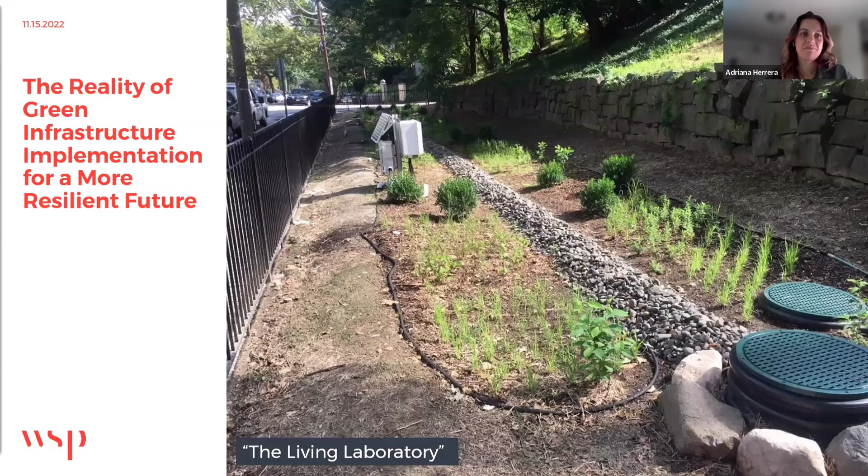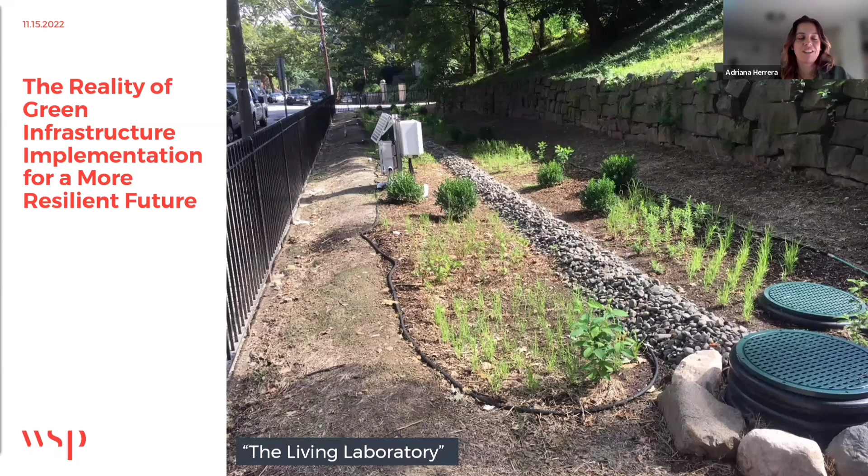As you mentioned, my name is Adriana Herrera. Fun fact, I was actually a part of the inception of the Living Laboratory as part of my senior design project in 2016, working as a member of the first team to do basic concept design and modeling for green infrastructure practices throughout the watershed of the Stevens campus with Professor Fassman-Beck and Professor Brunel, which now currently exists on campus. So if you walk by, you can check it out.

That was completed by other students after my time, but working on paper, so to speak, I had no construction or feasibility of implementation experience, which has led me to my discussion today with you all, where I hope to share the positive impact that green infrastructure can make on a more resilient and sustainable community, but how one must consider all the enablers and barriers that go into the implementation outside of the design and innovation that we all love to dig our brains into.

So just a quick background about myself and my journey to how I got here. As it was previously mentioned, I'm a Stevens alum. I graduated in 2016 with an environmental engineering degree. I started my career at TRC Environmental, where I worked as a remediation engineer specializing in groundwater treatment. I managed sampling programs and injection systems for about 3 years.

I switched internally within the company to work in their site and land development department, where I worked alongside construction management to integrate and assess stormwater management practices and systems. All the while, I was working towards my master's degree at Stevens with a focus on water resources, which I completed in May 2021. Looking to expand my stormwater management water resources expertise, I joined the WSP team a little bit under a year ago as a water resource engineer, where I currently work with a fantastic team, performing hydrologic and hydraulic studies, designing green infrastructure, and supporting dam rehabilitation work.

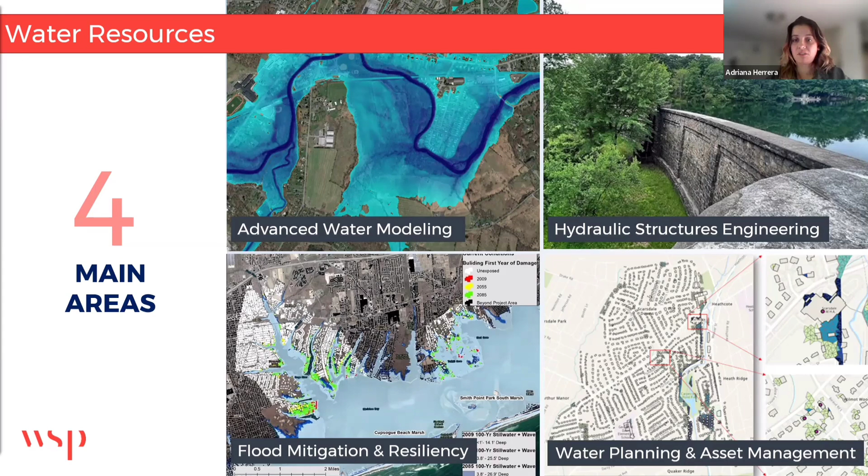One such solution practice is that of green infrastructure or nature-based solutions. The solution type is becoming more frequently a response to a growing environmental concern of climate change, which has increased storm event frequency, increased storm severity and rainfall volumes, and contributed to sea level rise, leaving many environments at risk. Specifically, urban environments, which typically consist of high impervious areas, are in need of a sustainable and resilient solution, such as green infrastructure, to manage the strain on the existing systems.

And this is a current project that is being worked on by WSP. And some of you will recognize, there's Stevens campus in the middle corner, where we've done an assessment in Hoboken.

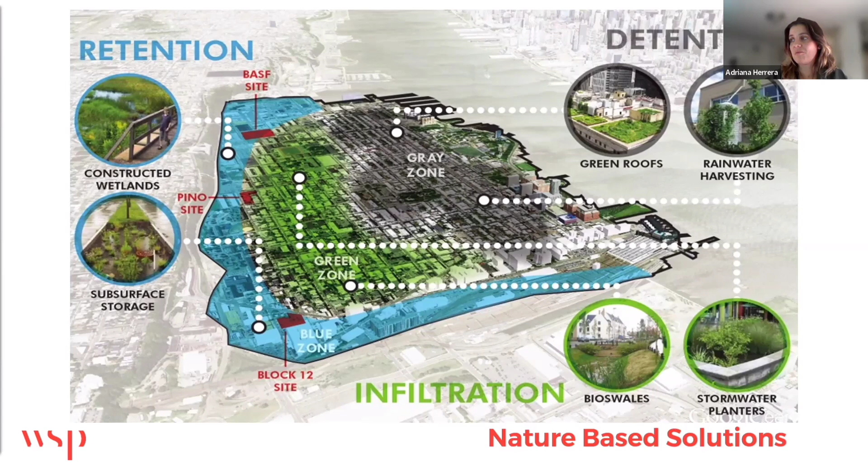So why implement nature-based solutions? Beyond water management, nature-based solutions can also improve air and water quality, provide climate resiliency, and benefit habitats. However, within communities, green infrastructure can also reduce infrastructure costs, such as water and energy consumption, promote economic growth by creating construction and maintenance jobs, and impact the health of the community, providing more green spaces for recreation.

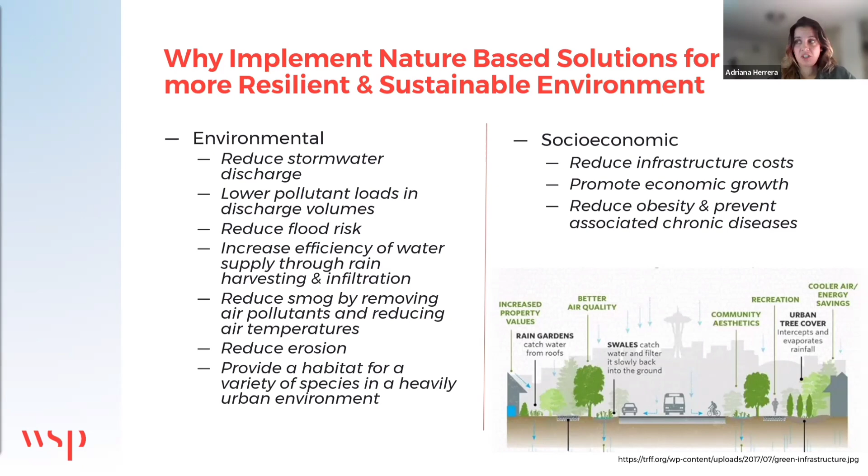Seems like a no-brainer that urban planning should become more sustainable and resilient by incorporating green infrastructure into urban development. However, we do have to balance novel design concepts such as constructed wetlands, rain gardens, porous pavement with the reality of planning and construction barriers. Furthermore, how do we meet our clients' needs with consideration for their own limitations in terms of funding and space?

So, general barriers to green infrastructure. There are some general limitations that take the form of technical and physical, either lack of knowledge or conflict in space; legal and regulatory, conflicting laws or not enough regulation guidance; financial impacts, where there's misperception of costs or lack of data to counter otherwise; and then community institutional perception of the benefits and implementation of green infrastructure.

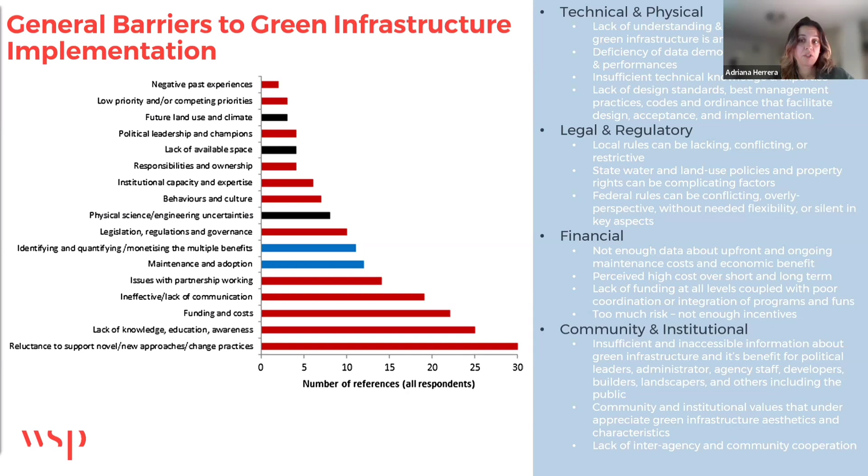So, green infrastructure implementation approach. How do we, as a hired consultant, then steer our client in the right direction to ensure a sustainable and resilient solution that prepares for changing conditions, resists or withstands stressors, recovers positively from excess strain, and provides socioeconomic and environmental benefit, by taking into account an interdisciplinary approach: understanding the need for green infrastructure through risk assessment, exposure, sensitivity, and adaptive capacity; strategy development, determining a strategy that is resilient to barriers through analysis of responses and recovery, understanding the hazards mitigation;

planning and policy making, making sure that that strategy aligns with not only your regulating governing bodies and appropriate permitting, but also with your key stakeholders, both internal and external; funding, ensuring to understand all appropriate funding sources that would alleviate community barriers that perceive green infrastructure as expensive, understanding how to invest your prioritization across the green infrastructure practices, and then the funding mechanisms, short-term, long-term capital funding of the municipality or developer themselves, or applicability for federal and grant funding.

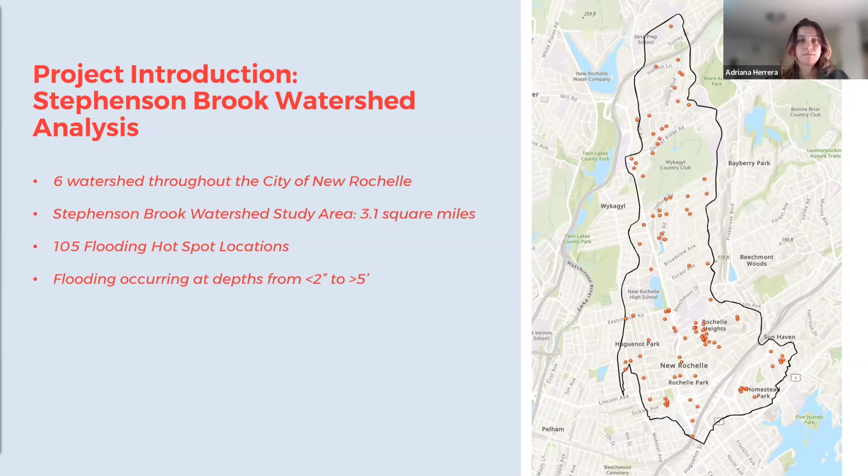So for the vulnerability and resilience assessment, the risk assessment was performed for the Stephenson Brook prior to the commencement of the project. It was conducted with a data review and field reconnaissance. Various publicly available institutes, including USDA, FEMA, NOAA, USGS, Westchester County, and the New York State DEC, were utilized for additional data acquisition on top of client-provided materials.

The field team assessed each location with a field reconnaissance to determine the topography in relation to the drainage inlets, the catch basin locations, and the number and quality of infrastructure catchments, and also to determine the existing system routing.

The initial review allows for clear communication and engagement with the community and other stakeholders to avoid any negative or misperception barriers. Throughout the field reconnaissance, our team, as always whenever you enter a job site, receives a lot of public scrutiny. So when talking with the public, you need to make sure that you understand and get their opinions and views of the situation. And also it's best to work with management and the client on how to proceed with public engagement.

In this case, the review proved especially beneficial, since during the reconnaissance we discovered that in the existing client data showing pipe and drainage infrastructure, a huge majority of the existing storm sewer connections, slopes, and inverts were missing. Without this initial vulnerability and resilience assessment, we would not have been able to determine where to site green infrastructure or where to model our hydraulics without that missing data. That would have been a technical barrier our team would have encountered. We then sent out additional field data collection with a sub-consultant to survey this information.

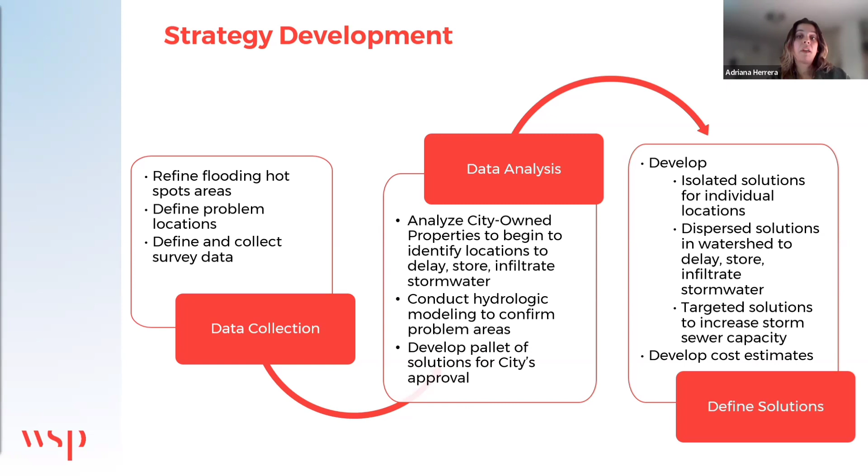This sounds really quick and simple. However, it took a few meetings, a couple of weeks' worth of back and forth with the client and all the appropriate stakeholders involved, to ensure that this strategic plan of what we're providing them aligns with what they want and need, as well as, as I mentioned, their funding sources.

So I've spoken a lot about stakeholders, and the key stakeholders would be the client, WSP, City Council, DPW, and the community. Our planning, as I mentioned, and strategic development needs to account for all of these stakeholders' needs and what they're going to be contributing and how they're going to be utilizing this plan and model that we've designed

after the fact. I didn't include governing agencies or regulatory agencies in here as a stakeholder, as I'm focusing more on the direct. However, those governing bodies would be included, especially when you're going through a construction phase and you'll need to be applying for permits.

This particular project, with planning and policy making, also incorporated that the green infrastructure only be sited in the right of way, which kind of helps avoid the public versus private barrier, especially when going through regulation policies.

So funding. This aspect of the project we have yet to begin, so my slide is a little sparse. However, based on our strategic planning, we already know how and what we're going to be implementing. We want to make sure that we're providing our client with an investment prioritization, and this goes back to our cost-effective strategy. Sorry. This goes back to how we want to make sure that we're providing them the strategic planning. Excuse me. Let me just reset.

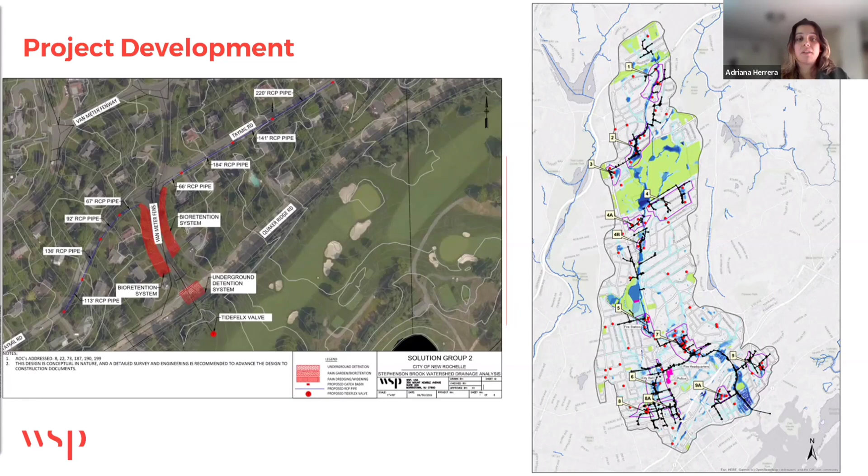And now for the fun part that we all love, the project development. Our team has completed our H&H modeling, and we're assessing the flooding locations, and our team is siting different green infrastructure and hard infrastructure practices. You can see this is an example. It's not a complete design yet of how we're going to be proposing new pipe lengths, new bioretention systems, new underground detention systems, and I'll just quickly go through a brief introduction of the different types of solution palettes that our team has assessed.

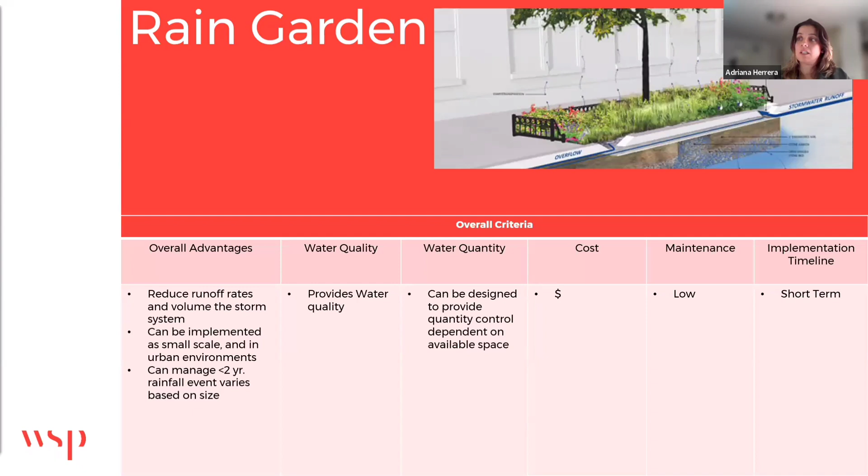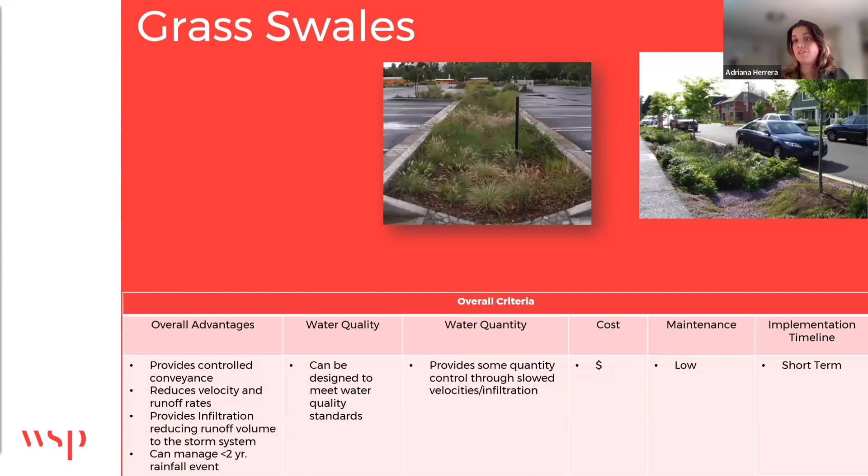Our team has, with the implementation strategy, gone through overall advantages, water quality, water quantity, cost criteria, maintenance, and then implementation timeline to help the city determine a prioritization ranking, not just from funding, but also for their BCA, benefit cost analysis. We've gone through rain gardens. We've also gone through grass swales, which, as you can see, the green infrastructure cost is relatively on the lower scale. And I will show that in comparison as we get into harder infrastructure, porous pavement, the cost starts to increase.

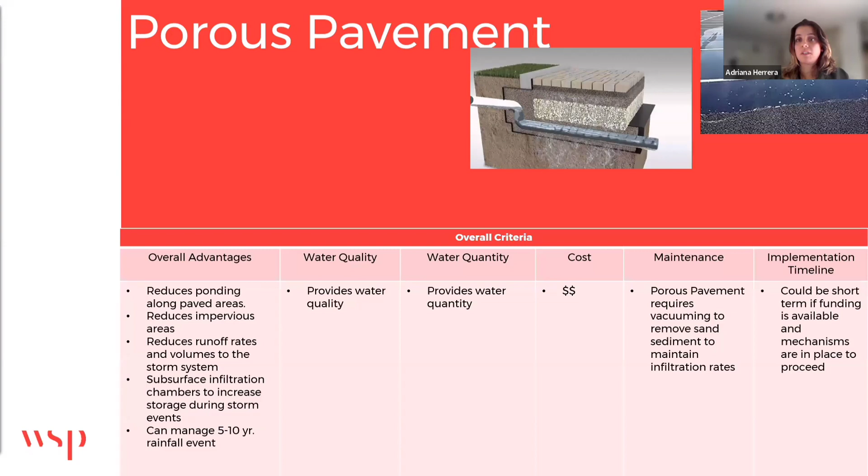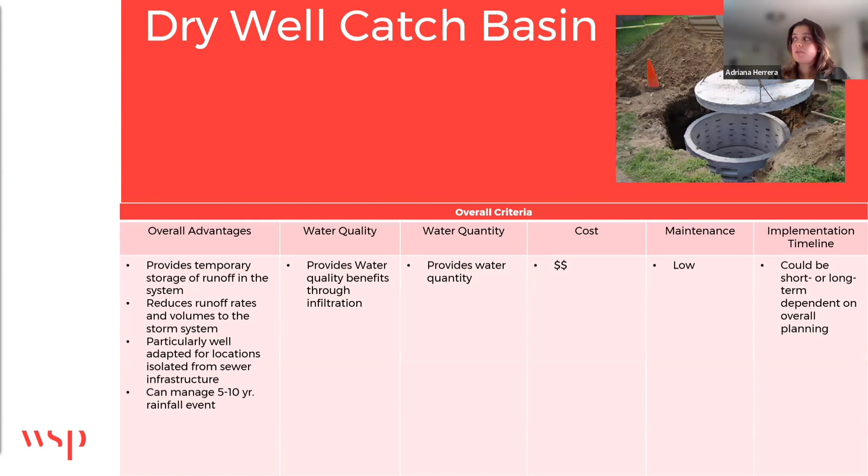The overall advantages for all of these, however, would be reduction in runoff, underground detention, a dry well catch basin, which provides temporary storage to alleviate the system. Our primary goal for short-term projects is to detain as much water so that during the storm, the conveyance is limited. Then we move into our very gray infrastructure, where we are adding additional inlets and also increasing pipe capacity sizes, where this would fall into more long-term capital funding type work, depending on the city's prioritization and flooding analysis.

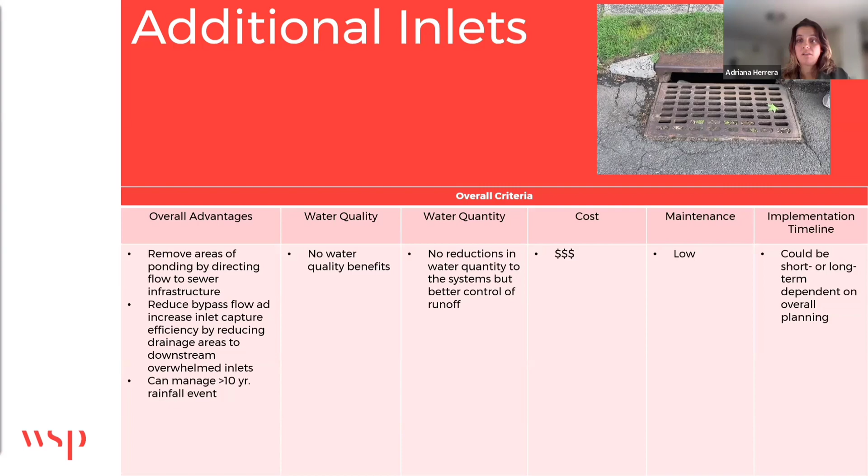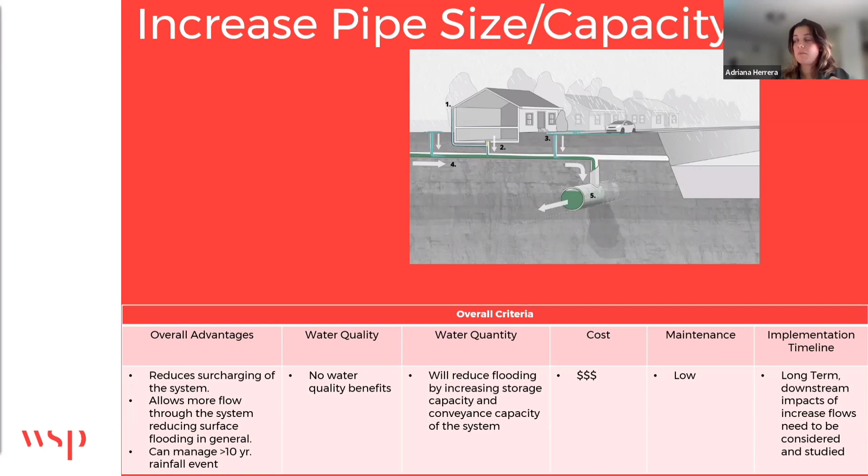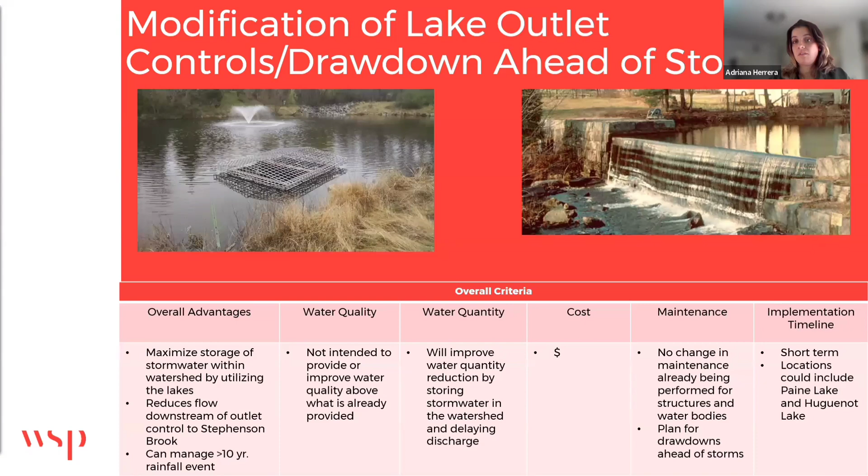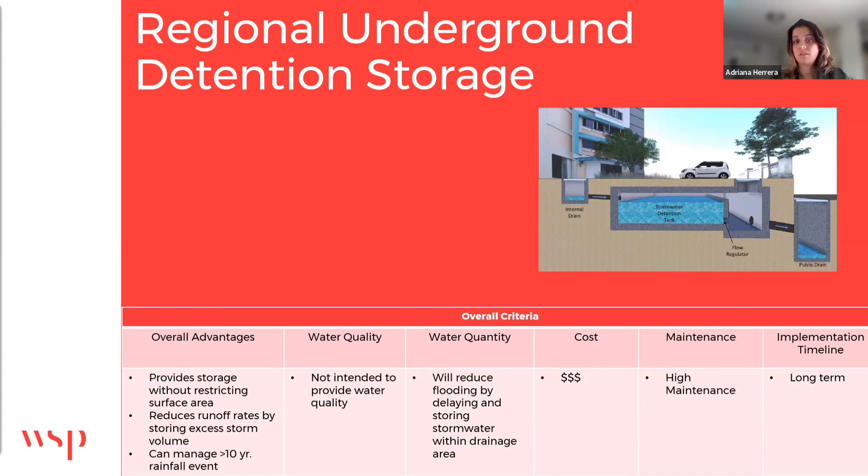Like I said, increased pipe sizes, which will help reduce the storm surcharge into the system and minimize the runoff within the roadways. As I mentioned, the Huguenot and Paine Lake are dams within the middle of the watershed that have outlets that could be modified to prevent backflow and flooding. Regional underground detention storage, which we're looking to site in the city's public parks. And then lastly, a modified operation and maintenance plan.

Presently, municipalities often deal with the barrier of lack of personnel or time for such large areas to appropriately operate and maintain their infrastructures. And this is not just the case with City of New Rochelle, it's across the board. Our team is looking to modify a maintenance plan along with our proposed watershed green infrastructure plan so that they could complete routine inspections, routine cleanings for not only the green infrastructure, but also their hard infrastructure with the personnel and funding that they have.

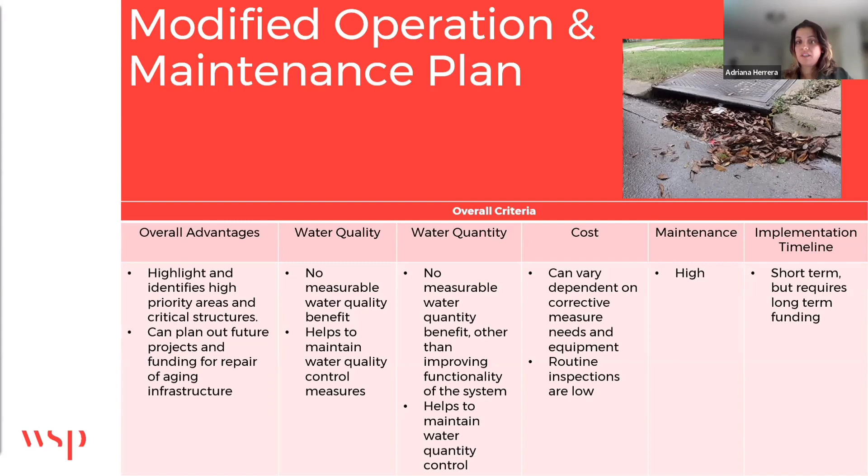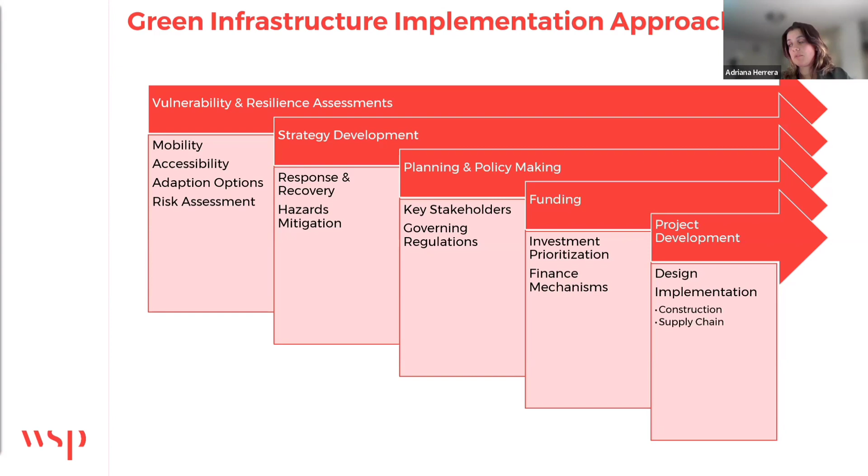So as I mentioned, the project development is the fun part that you get to do on paper. However, taking into account the funding, planning and policy making, strategy development, vulnerability and resilience assessment will in turn help you to identify and assess the barriers of technical and physical, legal and regulatory, financial, and community institutional to help your planning and design implementation run smoother. Thank you.